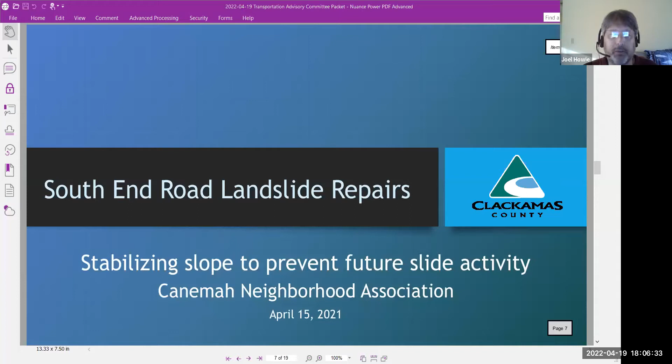So I'm going to hand my portion off to Stan Monty, who's going to be the construction project manager. Unfortunately, Stan wasn't able to make the meeting this evening, but I'm going to mainly give kind of the design side of things, pretty much the same presentation that I gave to the Canemah Neighborhood Association back in April of 2021, about a year ago. So is everybody able to see the slides okay? Yes. Good.

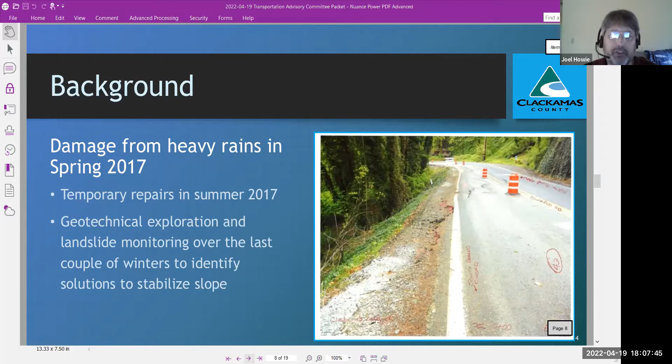So in spring of 2017, heavy rains created a bunch of debris flows on the road and restricted the paths the water is going to go, spreading everywhere underneath the road and activating the landslide that exists there. So the county did some temporary repairs, and then did some geotechnical exploration over the last couple of winters to really monitor what's going on with the slide. We did apply in spring of 2017, the governor declared an emergency, and we're eligible for some federal funding, which is helping pay for at least 89.73% of the project.

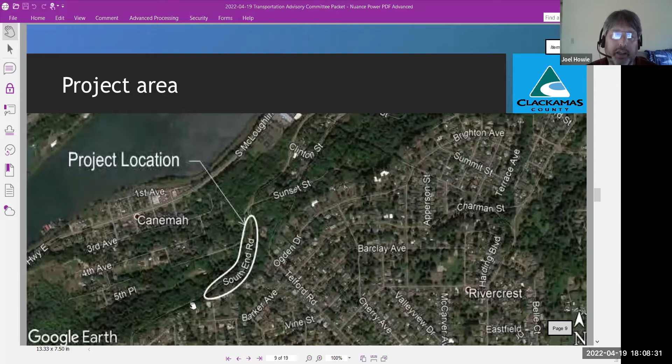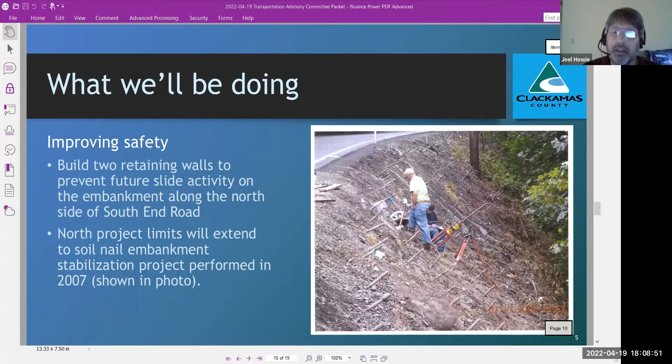So what we'll be doing is building two retaining walls to prevent future slide activity and hold up the roadway embankment. The north limits, back in 2007 here, we did these soil nail stabilizations. There's this power pole that still exists, so certainly you can't see these rods anymore, and the landscaping is back here. But anyway, our northern limits are at this section, and then the barrier rail is on the south side.

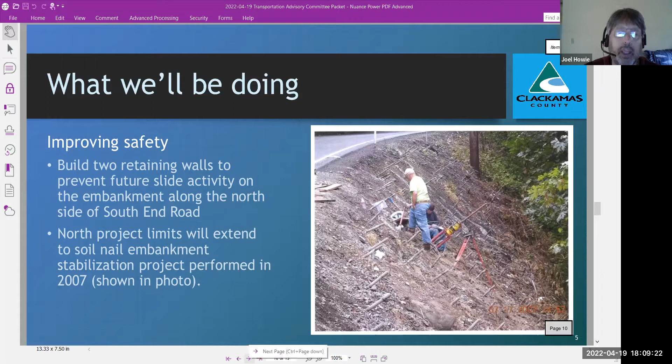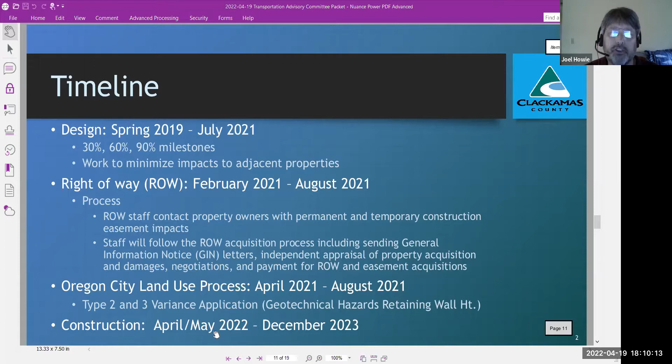The timeline is our right-of-way is complete, design is complete. We bid the project out and have a contractor, Stellar J Corporation. Stellar is proposing to close the road May 16th to start clearing and grubbing, prepping the site. PGE needs to do some work and might start a little earlier than the road closure, but they'll be in there as well. Then roughly the big work will start the first week of June, and I'll get into that later.

Community outreach - we do have a website, and I'm here. Not sure if my phone number is at the end, but my email is on the email list. If you have any questions, definitely let me know. We'll be sending out a notice of construction here in the next couple of weeks as well.

So the total funding is 4.6 million - 4 million ER funding, matched by 600,000 of our county road funds. When we did our geotechnical explorations, we really found 2 distinct areas, profiles of the landslide.

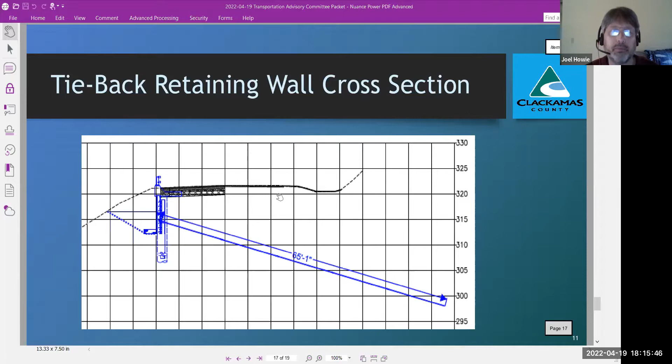So this is kind of the cross section of just the soldier pile retaining wall. The soldier pile with the tieback anchor will pretty much look the same as the other cross section, except we'll have this tieback anchor that will be drilled, and a big rebar will be placed at least 65 feet, at something like a 15 degree angle down, so we have enough capacity that this will withhold within the existing dirt or geology that's there.

For motorists, there definitely will be a detour, similar to the one we used when we closed the road down to do the temporary repairs. Since there aren't any official bicycle lanes or sidewalks, we aren't really doing an official sidewalk detour. We'll know more as we talk more with the contractor. It's possible that they might allow pedestrians and bicyclists over the weekends, but we haven't had those conversations yet.

And I will say regarding bike ped, I don't know how many people actually walk or bike to this area, but I did look at the Strava map and there are some bikers that use this road. So I just want to make sure that they are accommodated through it too. Thank you. You bet. Any other questions? I do, I actually have one or two.

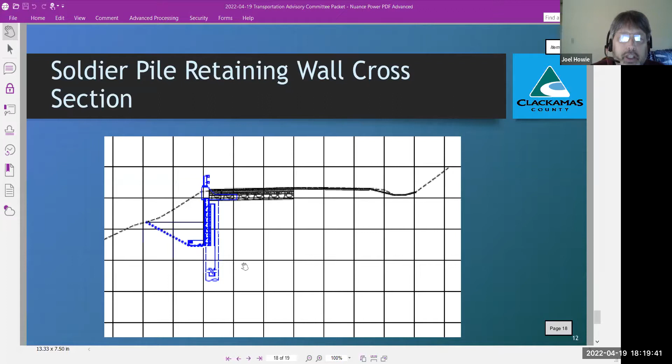Well, we are going to improve drainage along there. Let me go back a couple slides. It's hard to see, but water on the roadway when it rains, at least on the north side of the road, this rail will have a curb associated with it. So the water will collect adjacent to the curb, and we'll have multiple catch basins that collect the water and send it through pipes back to the other side of the road.

We'll do a much better job of collecting stormwater on the road. We also have a swale here, but it's short, only about 100 feet long at the north end of the project. Overall we're going to do a more diligent job of collecting stormwater that collects on the road. Thank you. You bet.

Any subgrade water control? Not really, because the walls are designed to incorporate the hydrostatic pressure that would come if the whole area had a bunch of water within it. So we're not going to try to collect it through the subgrade—it will just continue doing what it has done over time.